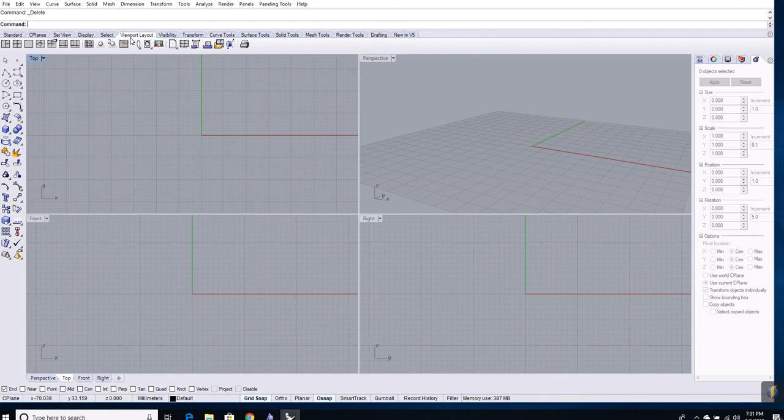Pretty basic. One thing that's going to help you a lot when drawing lines - personally I like to always snap to grid or use an O-snap. I have the O-snap turned on, and the checkbox I have is 'end,' because when you draw multiple lines, you have to be able to connect the ends together to make them into a closed shape. So I'm going to zoom in here a bit. I'm drawing in the top view.

So we looked at a single line. Usually you're not drawing a single line as geometry - you're usually using single lines just for construction lines, and we'll talk about that at some point.

So the next one, after the single line, would be a polyline. The polyline draws multiple line segments and puts them together. You can see I've got grid snap turned on so I can draw squares. Personally, I like to count grid lines over when I'm doing curves, because then I can measure things on the fly. And if I have to make another one, it makes it really easy, because I've just gone over one square, up one square, over three squares.

It becomes more like a game, like a useful kind of design game. So you end up with these rectilinear kind of lines.

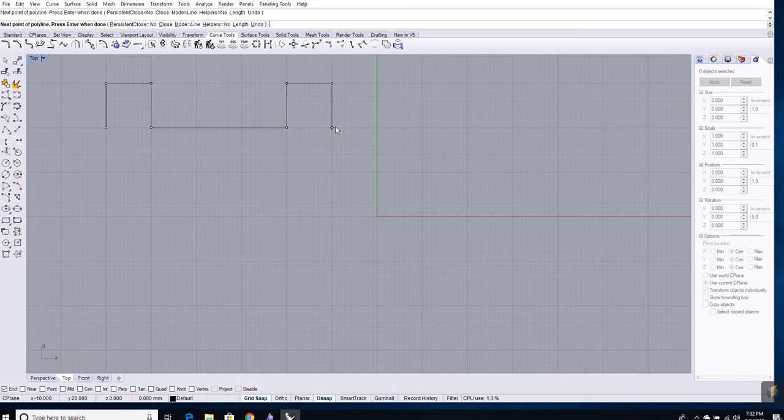Now if you want to draw curved lines, the one you're really going to want to use is control point curves. Now we're getting into Bezier curves and control points, and this is where drawing, whether in 2D in Illustrator or in Rhino, starts to get a bit tricky. So if I click there, go up one square, and now over two squares, then I click. You notice now that as I'm moving along that horizontal axis, my curve is changing.

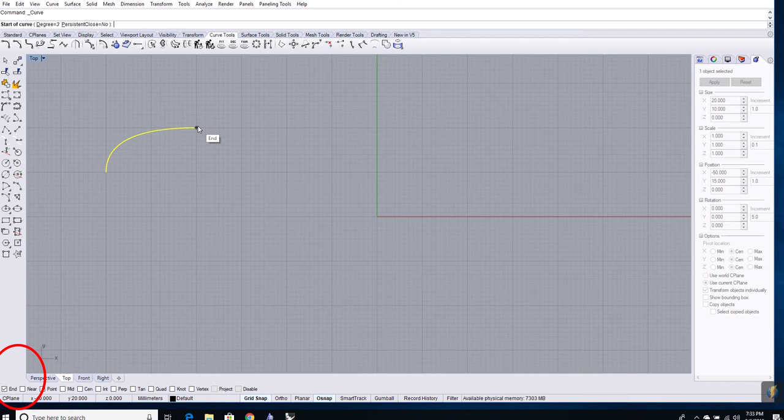So if I don't want it to change, I would click here and then hit enter. Now I've created that curve. But what if I want to keep drawing that shape? I can continue. But now I've got my end point turned on with the O-snaps, and that's where it becomes really handy, because now I'm getting feedback on the tooltip. I know my next line is going to connect with the previous line I drew, and it makes it really smooth.

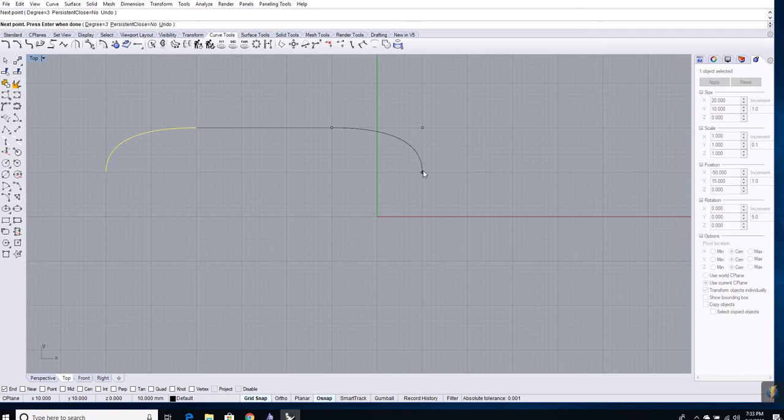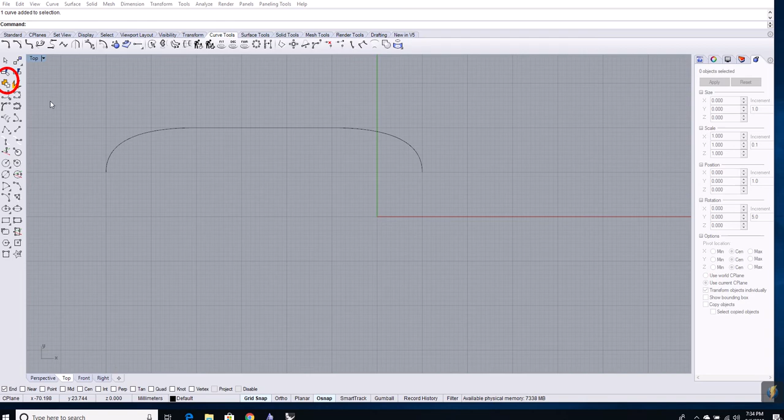Really sweet, so that I can draw symmetrical lines at this point, just by counting over these different squares. So now I've made 3 lines, and if I wanted to connect them into one line, I can do that - the way I would do that is the join tool. The join tool works for surfaces and curves. We click on it, select the curves we want to join together, hit enter, and now they're one curve.

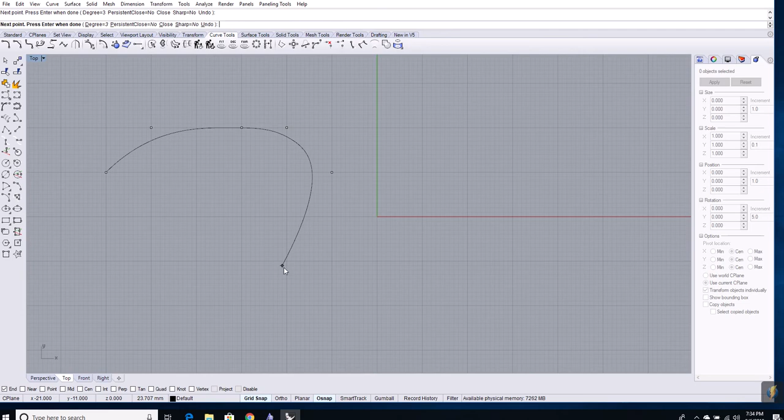Okay, so that's not making a shape - that was just a symmetrical curved line. So if I want to make a continuous shape, I can use the same method, control point curves. If I do it very freehand and go along kind of snap, I'm not really too concerned about what I'm going to end up designing - I'm just doing it as a demo. So now I've got one closed curve.

And what I can do with that, of course, is extrude it, because we looked at that in the last video - extrusion. So for the demo, I'm going to copy it, just do Control C, Control V. And when you do that, you've probably noticed by now that you can have multiple objects basically in the same space, and you can't see multiple objects, but there's multiple objects there.

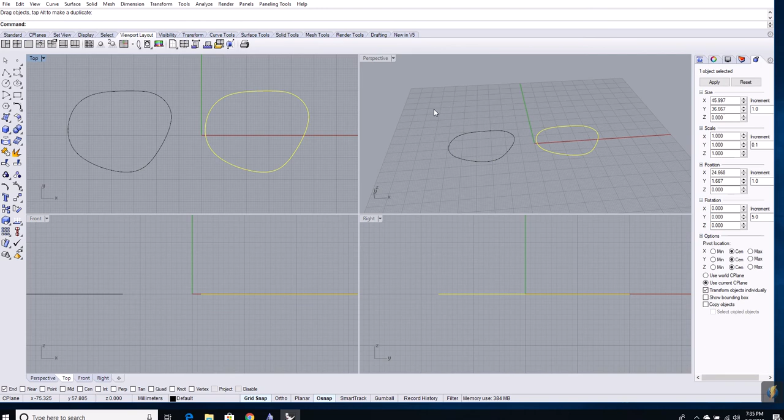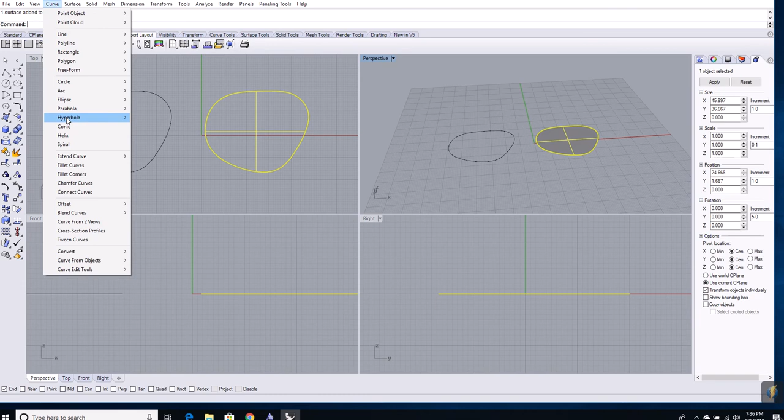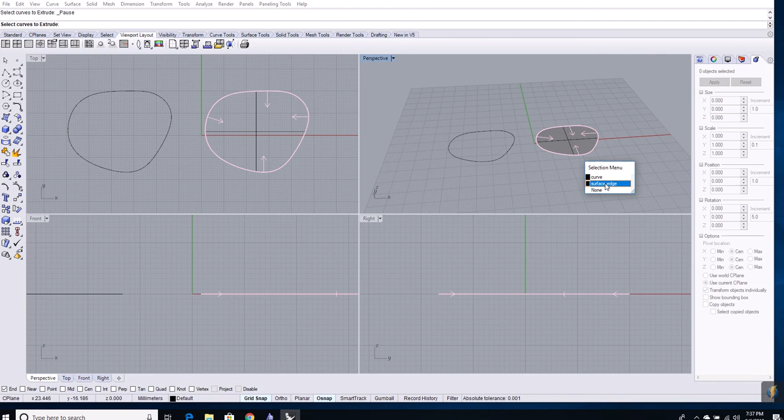Okay, so now we're going to extrude it. We can extrude the curve straight, but we can also extrude this as a solid. So on the top menu, we go to extrude planar curve. In the command line, it's asking me to select the curves to extrude. I'm going to click the surface and then press enter when done. And because I selected the surface, now we have a solid.

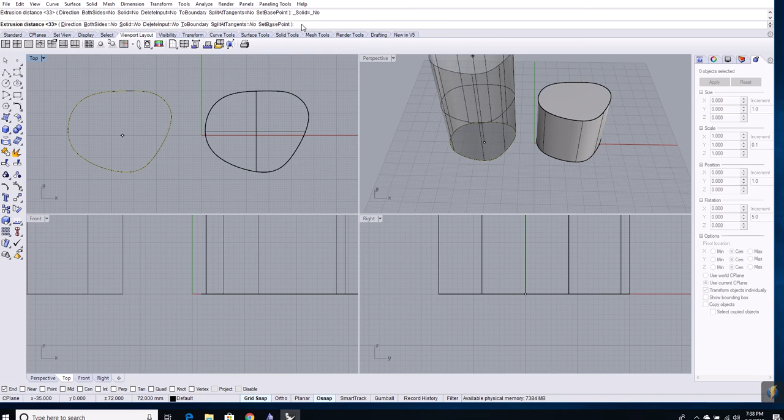If I wanted to extrude it not as a solid, but as a surface, I could do that as well - all I would need to do is extrude the curve straight. Now, the other thing with these tools is if you want to be more accurate, you can select it, hit enter, and then go up to the toolbar and type in the number you want for the height. So I typed in 25 millimeters and it gave me that.

So this one is extruding the curves, and that one we extruded the surface. So this one would be a solid object and this one is an open shape.